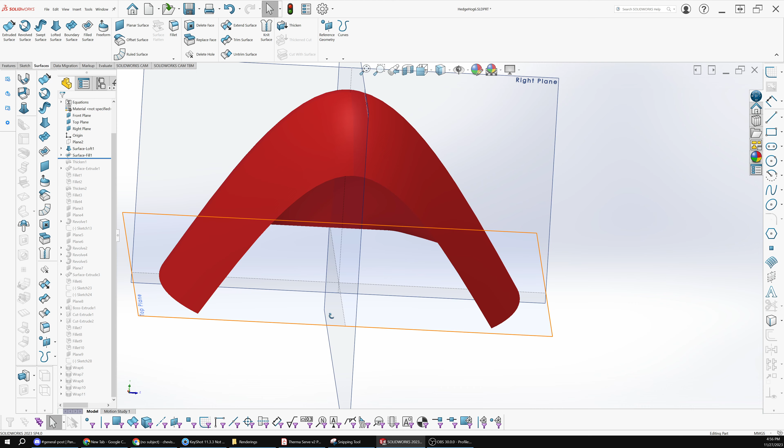Okay, so I would remove this little round. Oh, I see, you've got this as a solid. So I would be doing this all before making it a solid. Making it a solid would be the very last thing I did. But I see what you did, wherein you took...

Okay, so, because these parts are actually one piece, and then they're painted or colored, is the reason I wouldn't be doing that as the last thing. But I understand what you were trying to do. Okay, cool. So, but what we can do is, okay, and that's there perfectly.

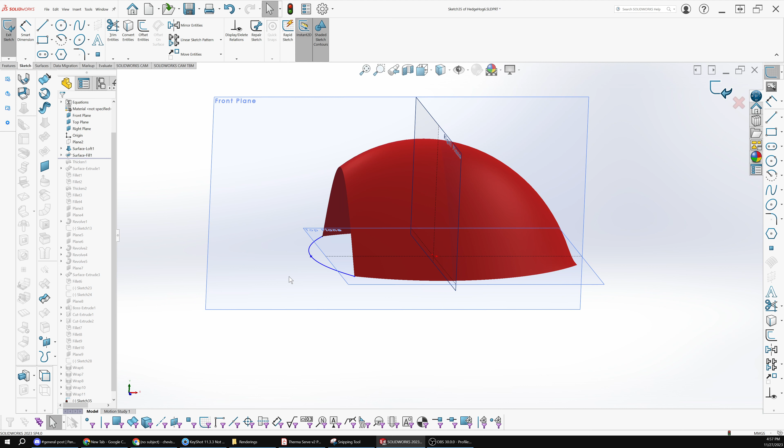Excellent. So we just talked about having a top curve and the side curve to get that spline. So what we would do is we come in here, and I'm doing this very quickly. We're going to go sketch, and we're just going to do spline. And I'm just going to snap to that edge there.

We're going to snap to the center. And we're going to snap there. That way it just kind of gives me that automatic curve. I'm not going to adjust it or anything like that. Okay, so there we've got that.

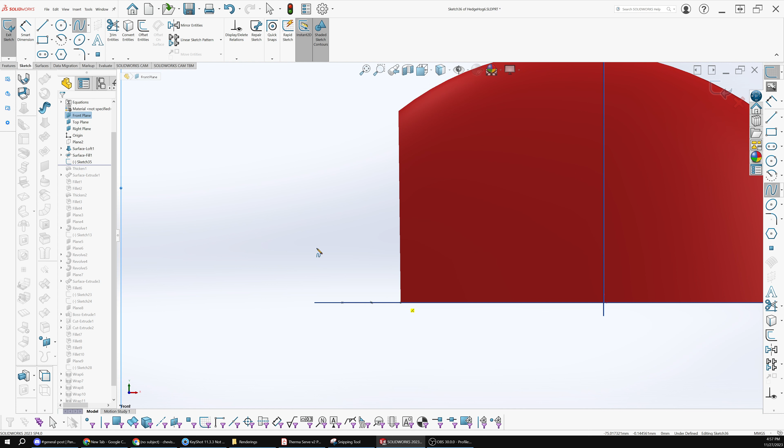Sorry, I'm just looking at your thing at the same time. So the next is we're going to come in and we'll do that side profile, what we want it to look like.

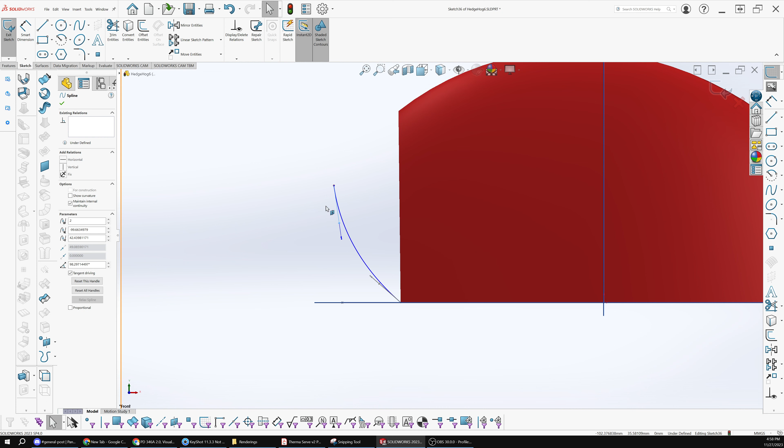Okay, and for that, we're going to go there and we'll adjust it. We'll say, I mean, you've got to play with how high that nose is, because what you have to look at is that this tip here is going to be the tip of that snout.

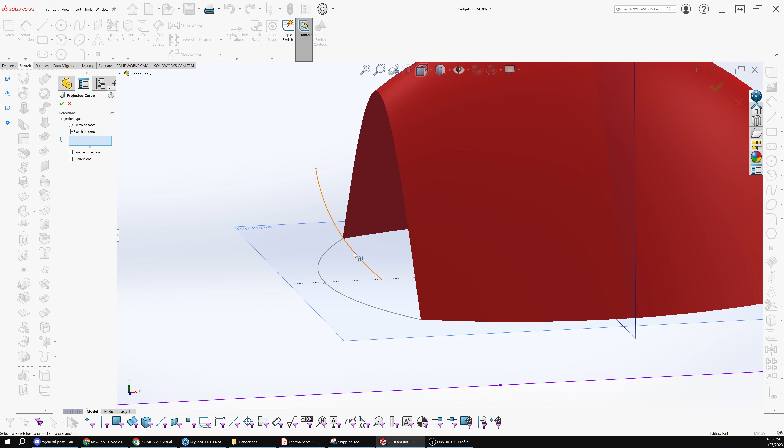Okay, so what we can then do, and we know how high we want it to go up, this is the path it's going to follow. So what we can then do, let's go in here, and let's go insert, curve.

Is it composite? No. Insert curve, projected.

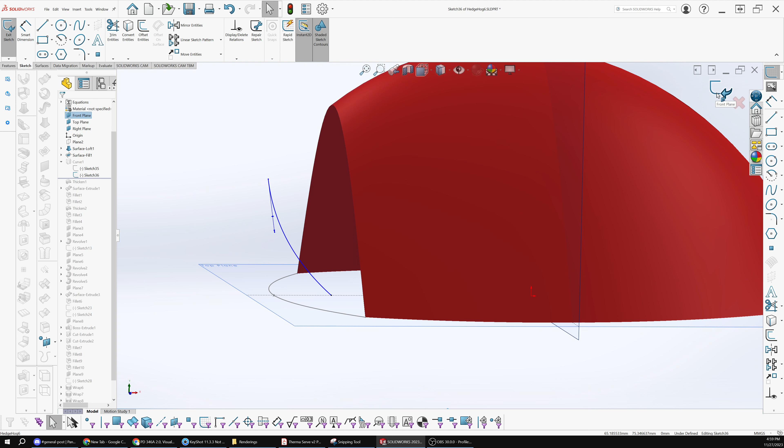Sketch on sketch, gotcha. And we're going to go here and here. And see how it created that now? Okay, yeah. So then, maybe you have to adjust this or whatever.

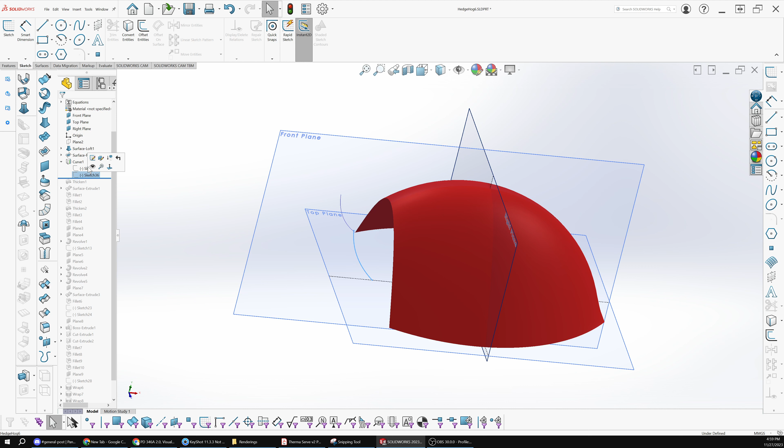I don't think I have it out nearly far enough. So let's just get it out a little bit farther because... oops. There. Because what I'm going to do doesn't work if it's not far enough out.

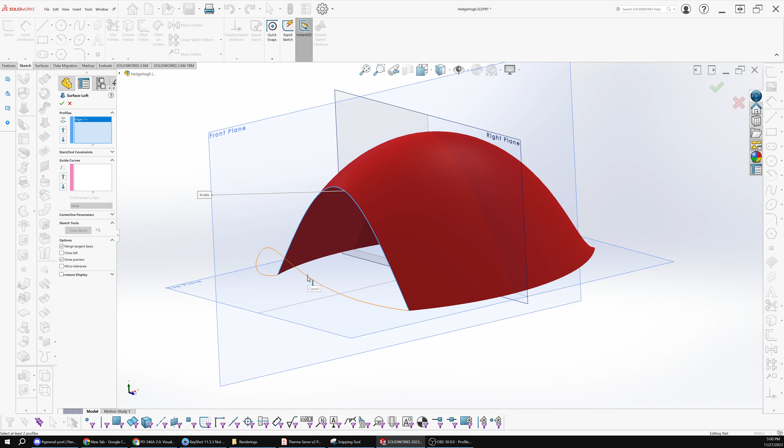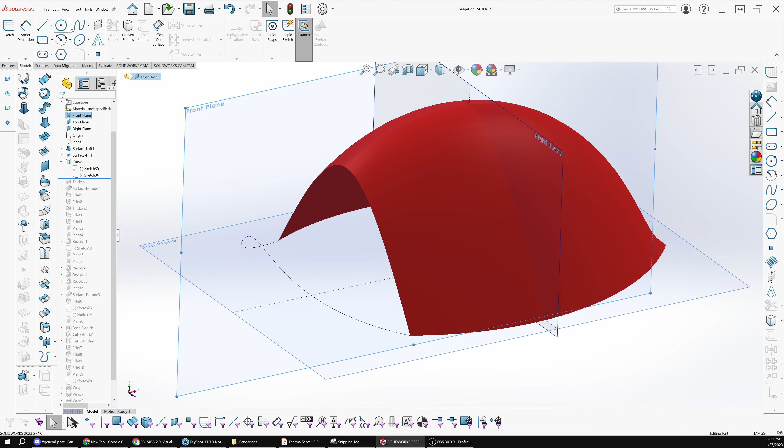There we go. So now I've got this shape. And like I was saying, if I go and I just loft from that edge to that edge, it gives me that straight profile. So, because that's all it knows.

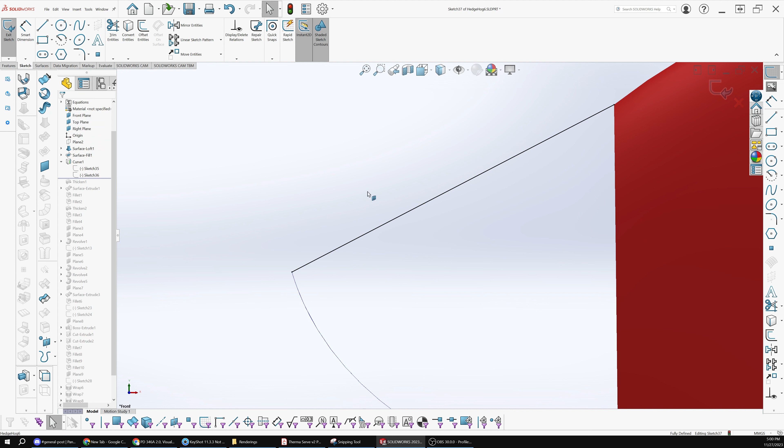What I can then do is come in and we're going to do it on the front plane. And we're going to create a sketch. And what we want to do is we want to have it snap to this edge of the surface. And then we want to have it snap to that point on the curve.

So what we need to do though is click the end of the item, click that curve, and say make it pierce. Okay, so now we can come in and adjust it however we want.

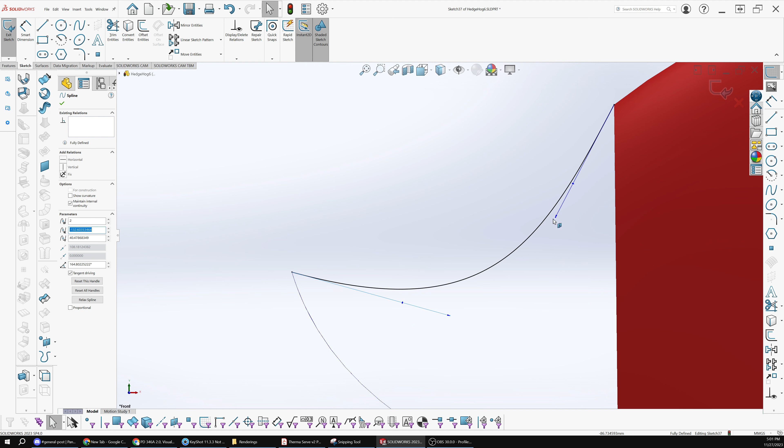Can I ask what button you're clicking to make that line a spline? Oh, so it was always a spline. Oh okay, sorry, just because it was a straight line, I was like, uh-oh.

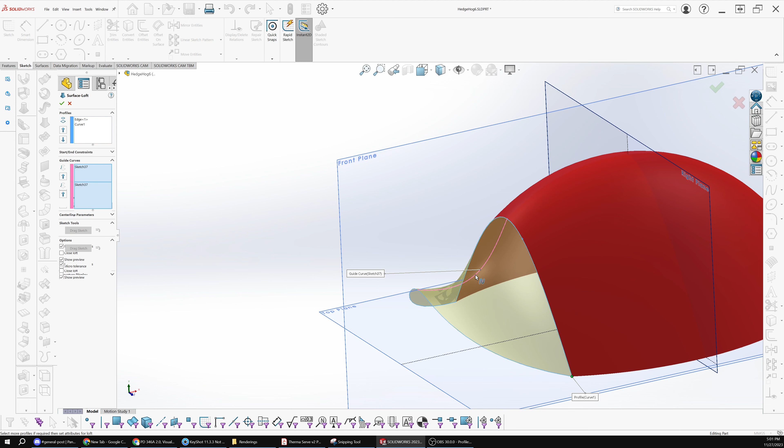No, yeah, so what I did was I just drew a line. I drew a spline as a straight line, and the difference between a spline as a straight line and a line is that the spline, even though perfectly straight, still has these handles I can manipulate. Gotcha, okay. So then what we can do is adjust things however we want.

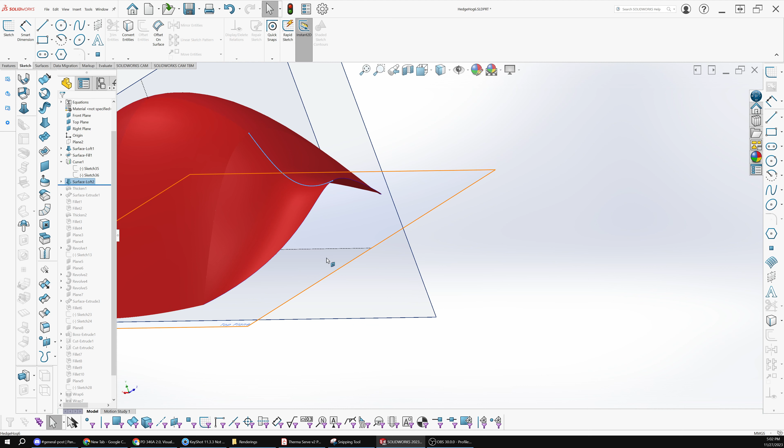And now what I can do is come back and go lofted surface. And we're going to loft from here to here still. Because in the loft we need start to end.

And then we're going to say guide curve. And we're going to grab that guide curve. And now you can see that we've got that.

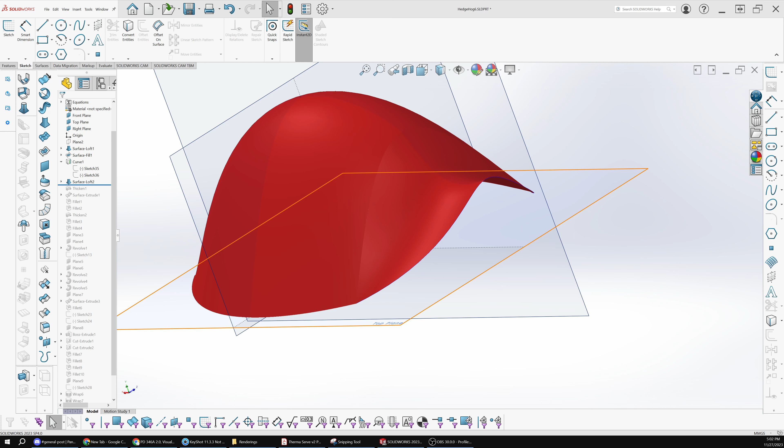Then I would go back, and now with this, you can see how much of a curve there is here. Maybe you want that to be sharper, so you would create your other curve to be sharper. Okay, and then you can play with that.

And then just one more question. And then because I already have the bottom on, should I remove it and then add on the bottom after everything? Should I go back? I would go back and add the bottom on after.

Like what I would do is I would get that, if I'm looking at this, here, let me go into here. What I would do is this entire shape, minus anything that is raised up or protruding, was the initial form they started with. So I would create that initial form.

Then you can go in, you add the nose, you add the feet, you add the things that are protruding, like you did on that top piece. And you can change the colors there. Does that make sense? It's a little heartbreaking, but yes, it makes sense.

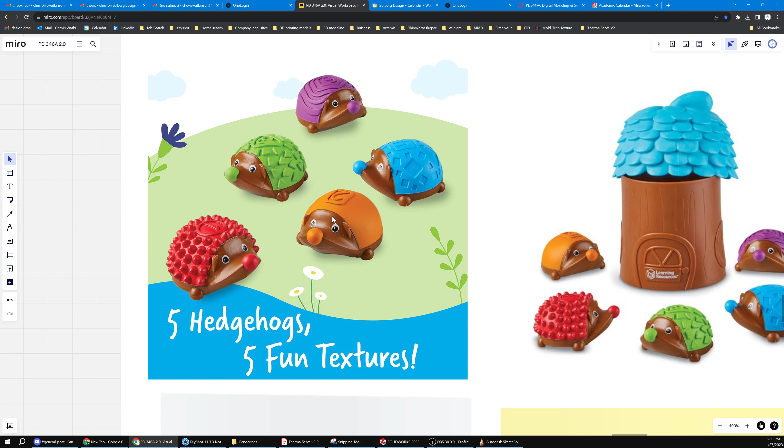Well, you can keep going the way that you're going. I just showed you how to get this front face and what I would do. That same approach could still work. It just, in my mind, it might be more troublesome. Gotcha, but give it a try and see what you can do.

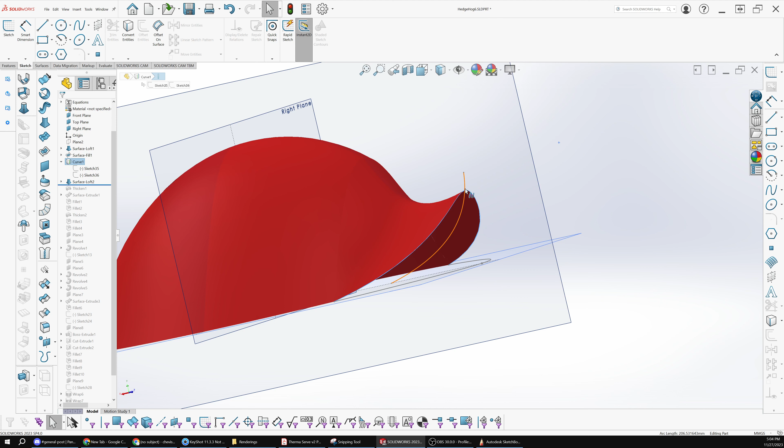So then if I do continue the way I was doing it, should I just also do the bottom portion of that face the same way as you just showed me with the top portion? Well, yes. But the difference is where I used this edge, for the bottom portion, you want to use that curve, that edge.

Okay, so, and you've already got it here, so, I mean, literally, you could just draw a bowed curve from here to here and loft that to that. And then does just that use make those same lines? Yep. Okay, let me stop the recording.